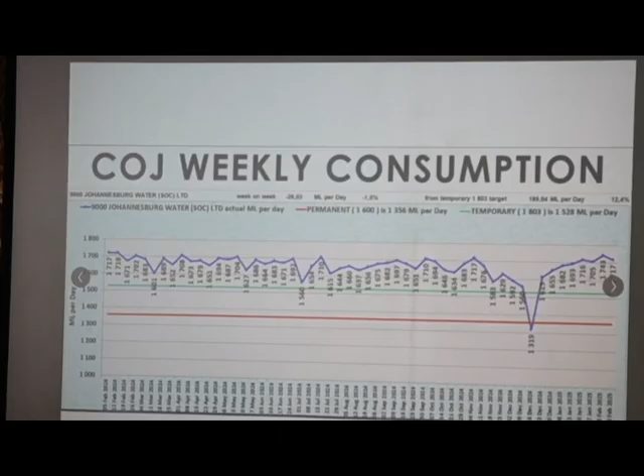For some reason this thing is now not working. Beautiful. City of Joburg - you can see it's a lot closer to the actual demand, looking much better there. And then City of Joburg also using quite a bit more than the allocation. So combined, Gauteng is using a lot more water than what Rand Water is geared to supply.

Now, some people were talking about the Lesotho Highlands project and how that's affecting the supply, and there will be restrictions because of the Highlands project. If you look at this, I've got some bad news for you. When they open that tunnel, when we get water from Lesotho, the problem is not going to disappear because we're consuming more than what we can supply within the network.

So it doesn't matter whether we have 100% full dams. If we can't get that water to the user, we have a problem. And that's exactly what we have.

Staff cannot flush toilets - I see heads nodding all over. Staff cannot use ablutions, customers and visitors can't use ablutions. So what now? So I want to focus on...

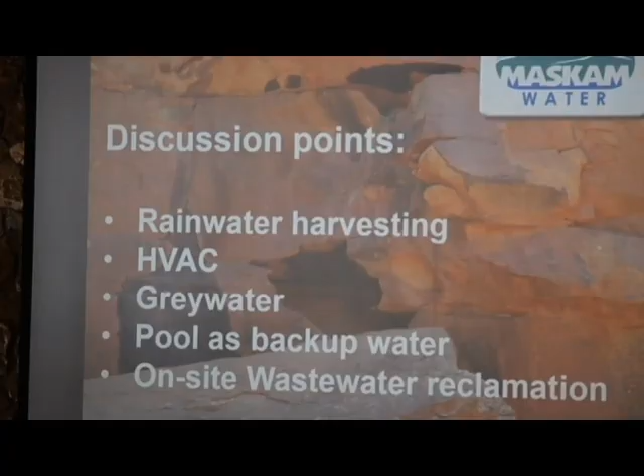Five different interventions that we can do. The nice thing is these interventions save us money while improving our water security at the same time.

The first one, we look at rainwater harvesting. There is a myth, and I've heard many people telling me it's no use harvesting rainwater because it's not enough.

Now, by a show of hands, I want to ask two questions quickly. Who in this room has either backup power or solar power at their houses or at their businesses? Okay, how many of you run completely off-grid, that you don't use any Eskom, you only use your alternative energy? Only 2, 3.

Now, that speaks volumes. Because on the one end, we expect rainwater to take us off-grid, to take care of our total need, and if it doesn't, we're not interested. But when we do solar power, most people use that to save money, to reduce the load on Eskom, and to have power when there's load shedding. But you still have an Eskom connection.

Rainwater is exactly the same. It's not there to take care of all your needs all year round. But whenever it rains, you harvest some water, you reduce your intake of fresh water from the municipality, and you allow the municipal systems to recover. So the municipal systems become your Eskom. They then have capacity when your tanks are empty.

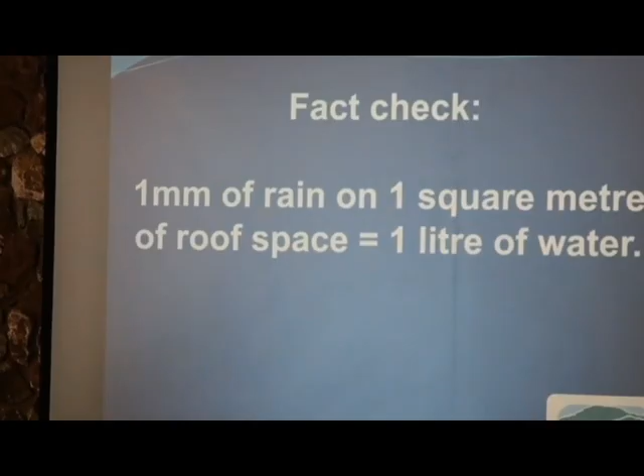And just look at the volumes we can harvest. 1 square meter, that's about the size of this. 1 square meter, 1 millimeter of rain gives you 1 liter of water. If you look at it differently, and you have a property with a 200 square meter roof, you can harvest 2,000 liters of water with only 10 millimeters of rain.

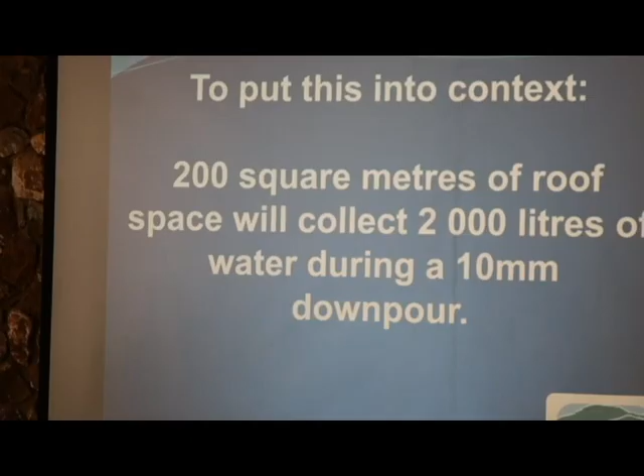Now, I did a calculation for a site in Limpopo not so long ago. They get 600 millimeters per year. Now, if you take your 600 millimeters per year and you have a 200 square meter roof, can you see how much water you can actually capture? You may not be able to store all of that, but even if you can store 50% of that, it speaks to water security and it speaks to you saving money because that's free water.

So, if we say rainwater harvesting is not worth it, think again. If you need bigger tanks, Chris is sitting in the back there, they do megaliter tanks, so that's also not a problem. You can store water.

The other side of it is parking lots, hard landscaping, hard surfaces. Now, I don't want to drink water coming off a parking lot because often it's contaminated with oil and tire waste and whatever else. But you can use it for non-drinking purposes.

How many square meters, now let me rather say how many hectares of parking lot do we have in Joburg? And all of that water runs off into our rivers and into our dams. Then we say we have a water shortage.

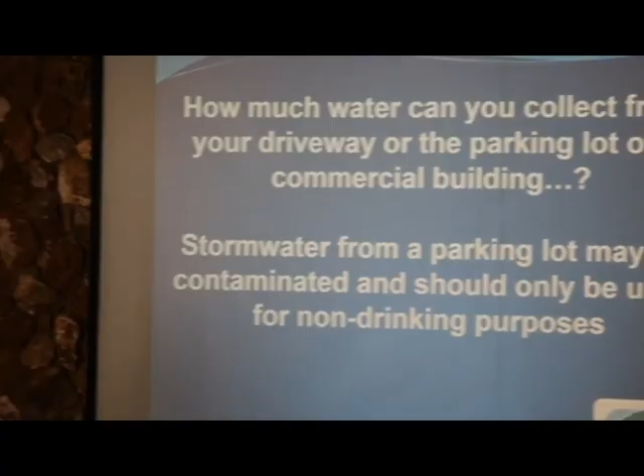Now, I've been very vocal about this, both in the city of Cape Town and Nelson Mandela Bay drought situations. In Cape Town, during the 2018 drought and day zero that everybody in Gauteng and worldwide knew about, the city of Cape Town was still dumping 450 million litres of treated effluent into the sea on a daily basis. Nelson Mandela Bay was still dumping 250 million litres of treated effluent into the sea on a daily basis.

Then we say we have a water shortage. We don't have a water shortage. We have a water management problem. Cape Town is now about to spend 5 billion rand on desalinating seawater, which will give them 50 to 70 million litres a day. 5 kilometers upstream, they dump 60 to 80 million litres a day of treated effluent into the sea. But we say we have a water shortage.

We need to think a little bit different. What can our parking areas do for us in terms of non-drinking water?

If you look at flash floods, yes, our rain patterns do change. It's been changing for the last couple of thousand years. But flash floods are also man-created because when we have natural earth, like we have around the country club here, and it rains, the soil absorbs a lot of water before you get runoff. With roofs, parking lots, and roads, every drop that falls runs off.

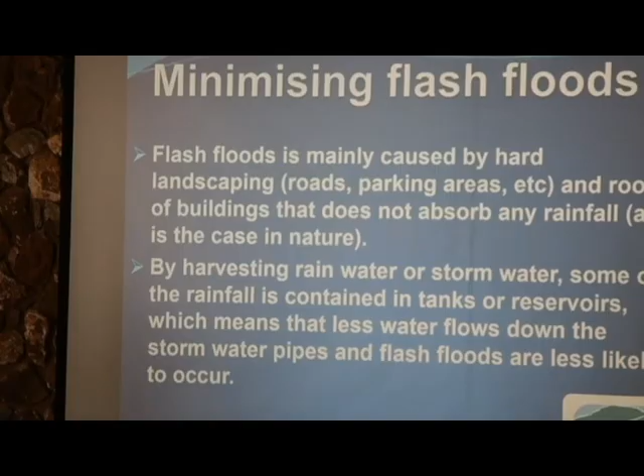Now, when we harvest rainwater, very important, we now first fill our tanks before we get runoff, before we get overflows. And you're going to say to me, yeah really, I've got a 5,000 litre tank at home, you think that's going to make a difference to the flood? No, it's not. But 1,000 of those 5,000 litre tanks is 5 million litres.

Now it starts making a difference. Now we start reducing our flash floods. So you see how this is all interconnected at the end of the day, and how what we do on site can have a huge positive impact downstream.

What we need to keep in mind with rainwater is that it tends to be acidic, and you need to adjust your pH before you take it into the property. Brendan will tell you what happens to your copper pipes if you put acidic water through there. How many years before you start replacing them? It's going to be a while, about 5 years average, then you'll start seeing water leaks coming through because you're putting acidic water through your copper pipes. Very important that you do pH adjusting if you take rainwater indoors.

There's a few things, not the only ones, but just a few things to keep your tanks clear. I spoke with somebody on Monday about this, and he said, you won't believe the amount of debris I'm getting from my gutters. I said, yes, that's why you need a pre-filter before you go into your tanks. Otherwise you collect all of that debris into your tanks and you pump that. It shortens the lifespan of your pumps, and if it's organic, it may cause problems with pollution and put a lot of strain on your filters.

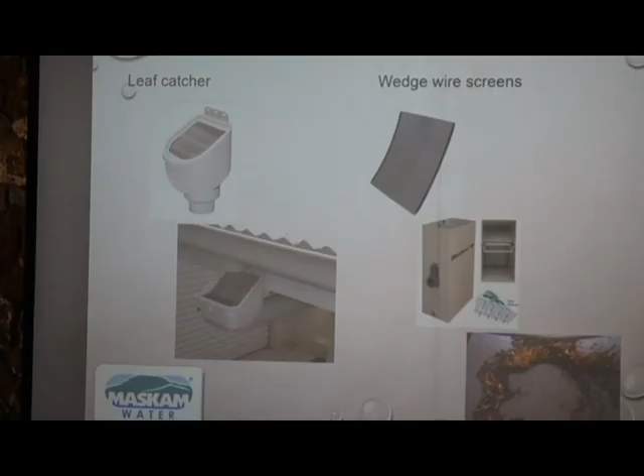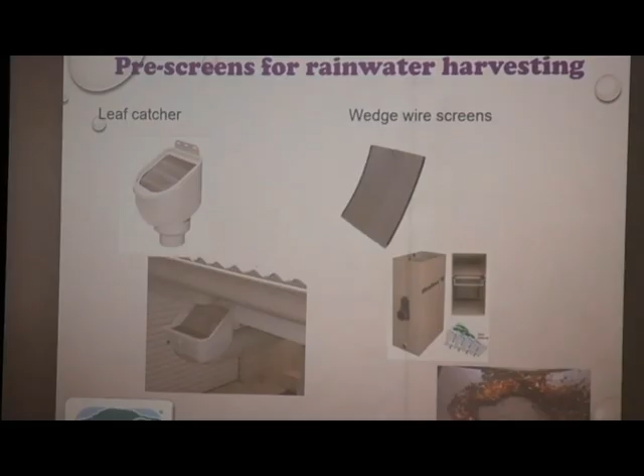So there's your leaf catcher. There's also first flush, that's not on here. There's these screens - that's a photo I took in Cape Town. You can see that wedge wire screen catching even algae coming off a tile roof. You've got your top of tank filters, you've got your vortex filters. These are very nice, especially for commercial buildings. With a vortex filter, you lose 10% of your water because it uses 10% to flush out the filter, but you never have to go and manually clean it. So from a maintenance point of view, it makes a lot of sense.

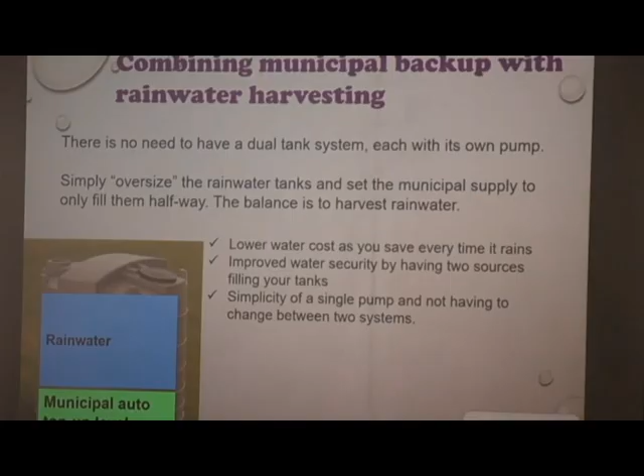When you do backup systems - Gerhard touched on that, people spending money on backup systems. You've got those 10 tanks standing there and they're all empty now. So what now? Now you have a backup system, and then you want to do a rainwater system, and then you want to do a borehole, and your borehole is dry or so contaminated you can't use it, and then eventually, how do you manage all those systems?

We've got a very simple way of doing that. One of them is for your backup systems: oversize your tank. In other words, if you need 10,000 litre backup, put 20 or 30 or 40,000 litre tanks up there. If you need 1 million litre backup, put 2 or 3 million litre tanks up there. And your backup you will set to a specific level, so your municipal water will always fill up to that point.

Whenever it rains, your rainwater will fill up the rest of the tank. And when your rainwater fills the rest of the tank and you start using water from the tank, you first use your free water.

Now, City of Joburg, for commercial properties, charge about 64 Rand per kilolitre for water, and they charge another 34 Rand for sewage. Your sewage is connected to your water intake, so you're paying 98 Rand per kilolitre plus VAT. You're saving 98 Rand per kiloliter a year.

But again, when you use this water, you allow the network to recover because you're not using network water. So when you're getting down to this level, there is water in the network. At the same time, another benefit is, let's say you've used your rainwater and your network is off, and you get a bit of rain, it will immediately top up this tank and you have water again. So it's a win-win-win all the way. You have one system, one pump, one filtration system, and it gives you a lot of peace of mind, and it saves you a huge amount of money.

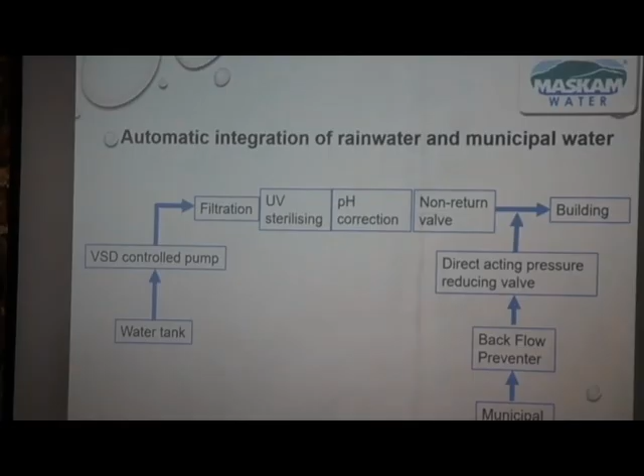This is just a quick diagram, I'm not going to spend a lot of time on this. We have your water tank, you have your VSD controlled pump, your filtration, sterilizing, pH correction, and you go into the building. Now in this case, we're not filling a tank - this is a direct municipal supply into the building.

And if you set the pressure on this one higher, then that will be primary and this one will be your backup. If you set your pressure higher on this one, that will be your primary and that will be your backup if your tanks are empty or if the pump fails or whatever.

So here you can still use this to fill up tanks as well. But here you have the best of both worlds, because now if the power drops, you have your municipal water pushing through. If your pump fails, you have your municipal water pushing through. You never need to go out and close this tap and open that tap.

Whoever wants to get up at 2 o'clock in the morning in the middle of winter to go and change taps outside? This is a fully automatic system. I'm not going to spend a lot of time on the design of it, just know it's a way you can have it hassle-free, like you have your electricity and your inverter that kicks in the minute Eskom drops. You can have the same in water - an automatic backup system, a no-hassle system.

Very important here is the backflow preventer - that is not a non-return valve. A backflow preventer is designed to guarantee that your water doesn't push back into the municipal pipeline.

I was in a meeting in Cape Town where one of the developers said, listen, we've got a greywater system, but that's completely separate, and we have a municipal dedicated line. We want the city to exempt us from having to install a backflow preventer. Now, it's a multi-million rand development, and that backflow preventer cost a few thousand. I said to the developer, well, the city took a hard stance and said, we tell you you'll do it and you will do it.

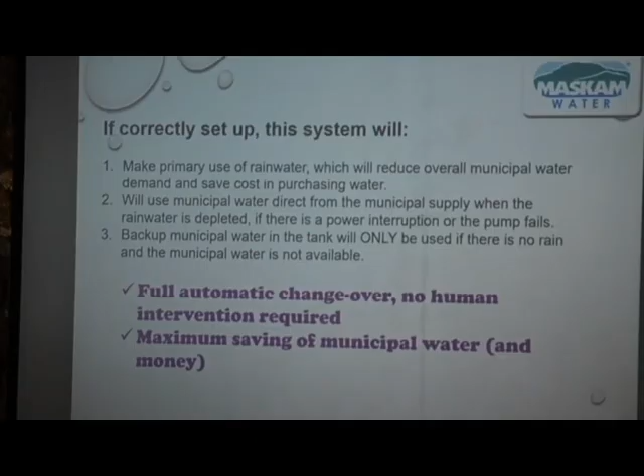So it's a fully automatic system, no human intervention required. It's maximum saving of municipal water because you're using rainwater, giving the municipal system a chance to recover. And the more alternative water we use, the better chance the system has to recover, which means there should be water in the system when we need it.

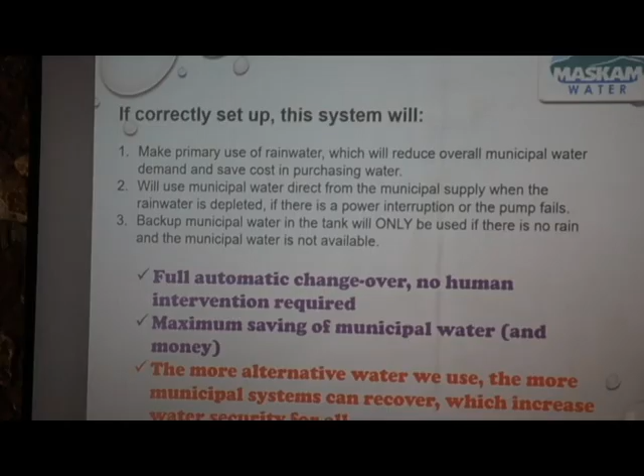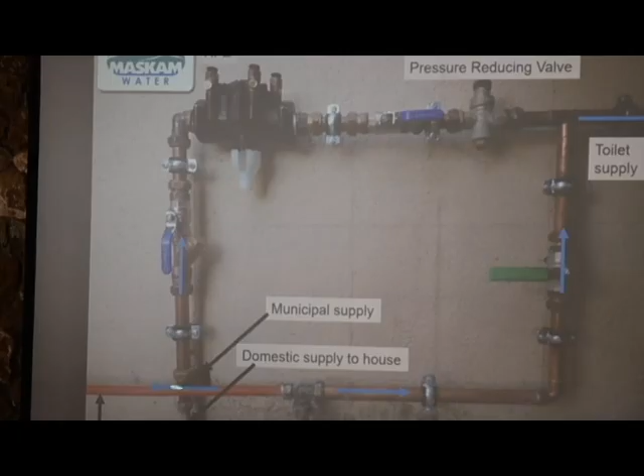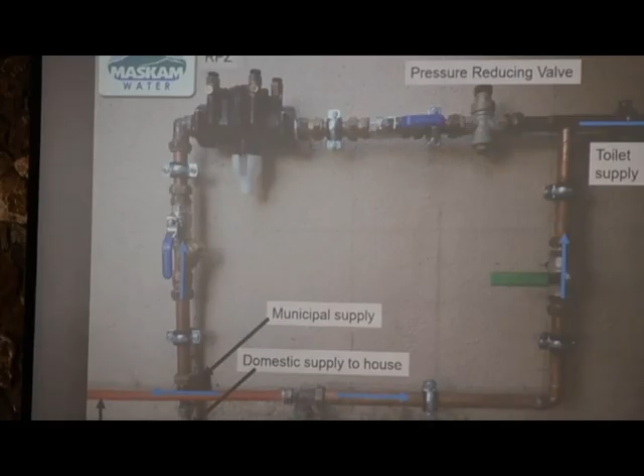Very simple installation - it was done by an IOPSA-approved installer, so don't have to worry about that. In this case, you can see that tap is closed, so the tank supply is now cut off to the toilets - there was some maintenance done at that point. But this is a very, very easy way of doing it, and you know you have a hassle-free system for the rest of your life.

So my message here is, it doesn't have to be a problematic system. It doesn't have to be, oh, I've got to remember to do this, and when it rains I must go do that - nobody's going to do that.

So just looking at 3 case studies. The first one is, well, the first 2 are single residentials, and the third one looking at commercial building.

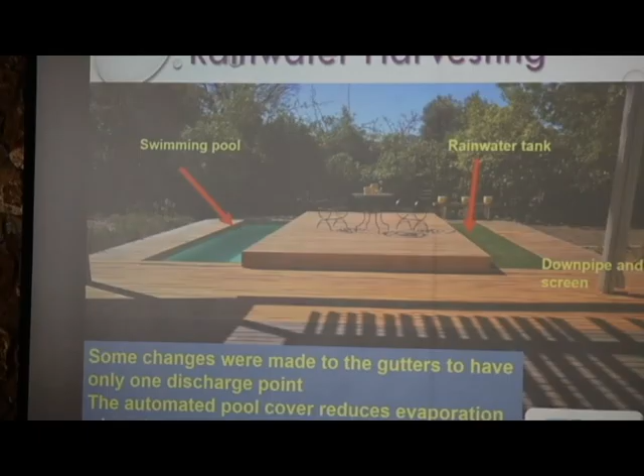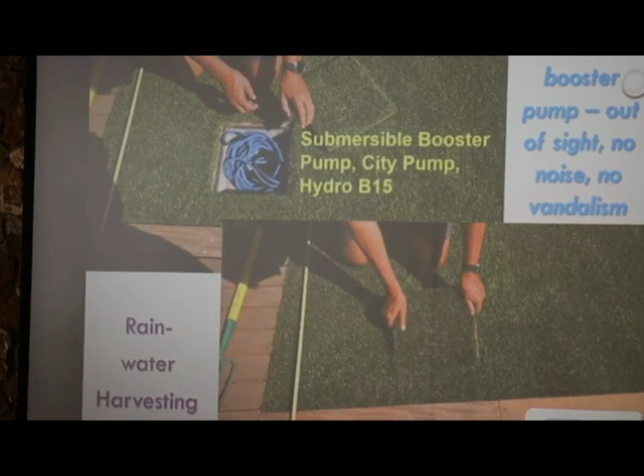The second one was a bit more difficult because there's a downpipe going to the street. There are 3 downpipes here also running to the street at the back. So all that water is wasted from site. Now in Cape Town at one point there was a bylaw that told you must take your rainwater to the street. You were not allowed to capture it many years back.

So to get this for rainwater harvesting, you can see this is a double story here, that's single story there, this is a flat roof dropping this way, this gutter is going that way. How on earth are you going to manage rainwater harvesting there? It becomes almost impossible. Agree?

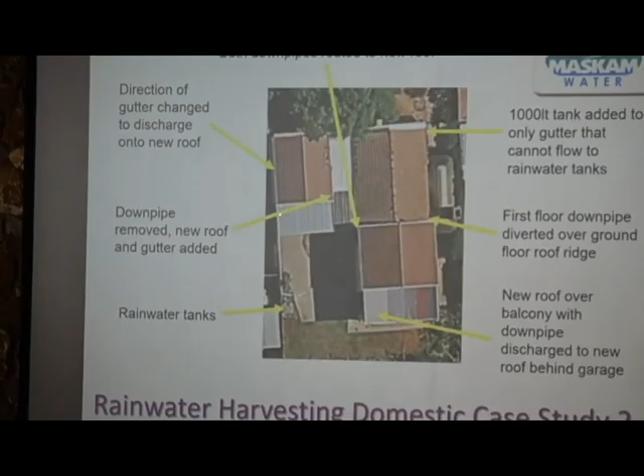Okay, the solution was a roof over here, which had to happen anyway, but then a roof at the back here, which made a big difference. So the gutter from this roof could drop back onto that one. This downpipe could drop onto that one. Because it's double story, that downpipe could be diverted over the notch here onto that one.

This one drops back automatically, and the angle of this gutter was changed to drop to the back and not to the front. The only water we couldn't capture in the central system was from that part of the roof. If we had to do that, we would need a pump to pump it through.

So if we look at it from a practical point of view, there you can see the double story pipe diverted. This was the part we couldn't capture, so that goes into a 1,000-litre tank that is used for car washing, filling a water feature and stuff like that.

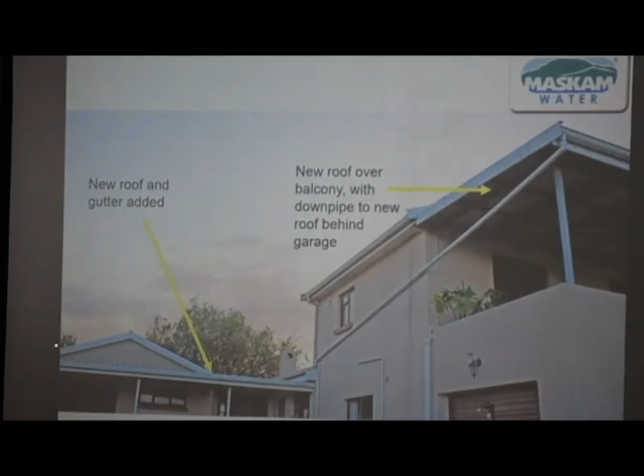And then at the back, you see that pipe coming in, you see that pipe coming in, the one on the left where the angle is changed, and everything dropping onto this roof. And from that roof, you've got a 110 pipe down to the water tanks. Small investment, but without pumping, you catch all of your rainwater.

In this case, it's about 250 square meters of roof. So 30 millimeters of rain, you harvest 7,500 liters. Can you do a 7,500 liters every time it rains?

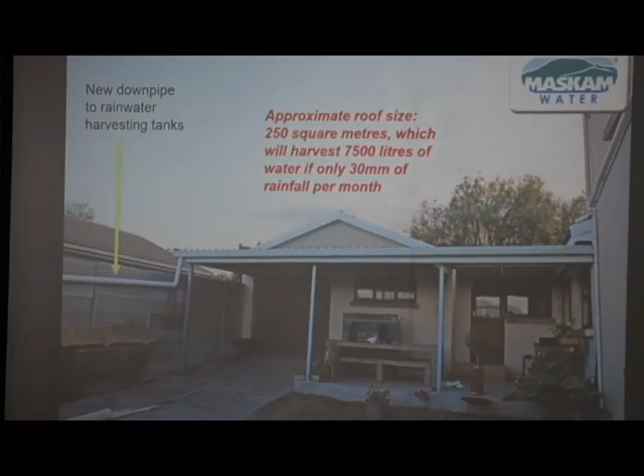Makes a difference, eh? You now think rainwater harvesting makes sense? You think it's worth it? Half of my audience is asleep.

Okay, then the same house went a bit further, installed a grey water system that catches everything from the bathrooms and the washing machine, except for the toilets. And that grey water is going into the garden for irrigation purposes. So now you have free rainwater coming down, which you harvest. You use it in the house, you discharge it as grey water, you harvest that again and use it for irrigating your garden. So you have a double win of the same water.

I used to have an irrigation business in the 90s when automatic irrigation systems sort of started becoming fashion. People would often ask me, remember it was many years back, if I spend 15,000 Rand on an automatic irrigation system, can I add 15,000 Rand to the price of the house when I sell it? And I said, no. Nobody will spend or pay 15,000 Rand for a second-hand irrigation system.

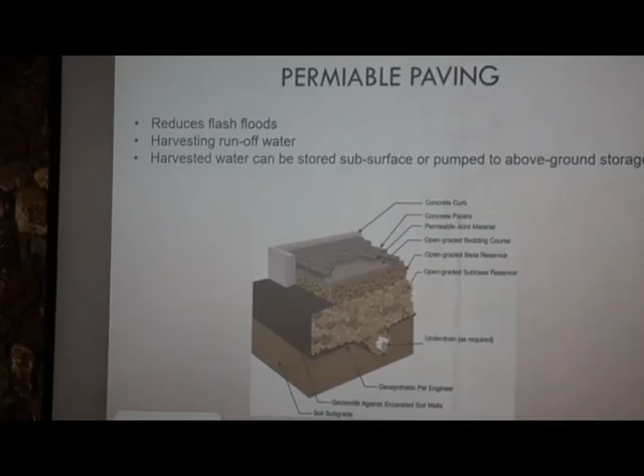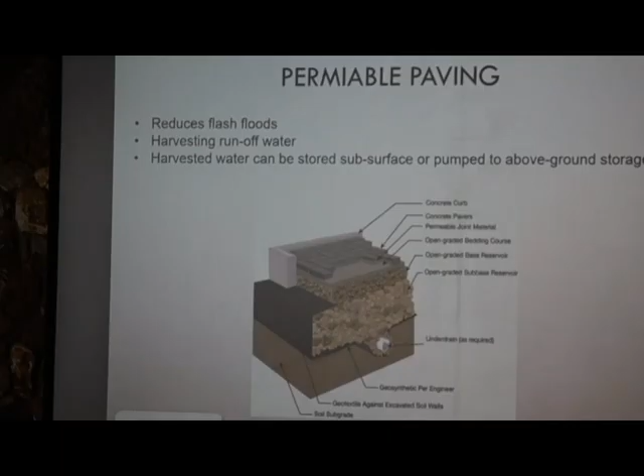So now you can harvest all of that water without creating a storm. Harvest it underground, pump it to above ground storage, doesn't matter, and you can use that.

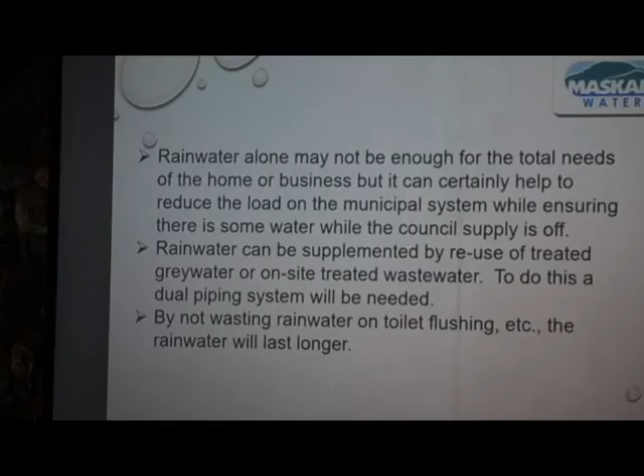Now, as I said, rainwater may not be enough, but it can be supplemented by use of grey water or on-site treated wastewater. Very important, if you use alternative water, grey water or wastewater recycling, to flush your toilets, to irrigate your garden, it means you put less pressure on your rainwater system. So the rainwater in your tanks will also last longer.

Why do you want to use rainwater to flush your toilets and then you need to go and buy water to drink? Use alternative water to flush your toilets and you'll have rainwater in your tanks for longer. Yet another way of saving.

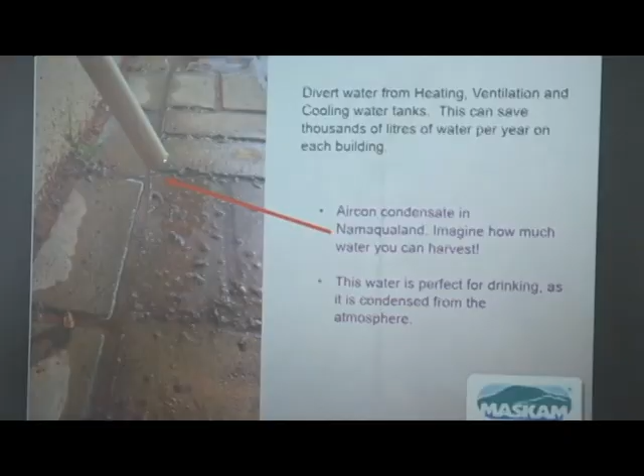This is just one slide on HVAC. This photo was taken in Vanrhynsdorp in Namaqualand in the month of October. That's the runoff from one single air conditioner that you see there. How much water can you harvest off your air cons, your heating systems, your ventilations? And that's pure distilled water.

Who of you have heard about air water generation? A few hands here. This is air water generation. It's condensate from there, pure drinking water, and we're dumping it on the paving and then we say we have a shortage of water. Harvest that, lead these pipes to your rainwater tanks.

Again, you don't need another system to do that. You just need to get this water to your rainwater tanks. And that will constantly top up your rainwater as long as your air cons are running, as long as your geysers are heating water. Immediately you have an additional top up. So there's an additional benefit.

If you look at our pools, pool water has never been seen as a source because of the chlorine or the salt content. What we can now have is a pool that can become a backup. Now, I'm not going to tell you to drink your pool water because you never know what happened in that pool, okay?

But it can be a source of water in case of emergency, be it for toilet flushing, washing your clothes, or whatever the case may be. And the way you do that is you get away from high chlorine content, you get away from high salt content by installing something like the Blue Lagoon pool systems. You get UV with copper, UV with ozone, different combinations. And you can either reduce your chlorine by 90% or you can go completely chlorine free. Now you have a freshwater pool.

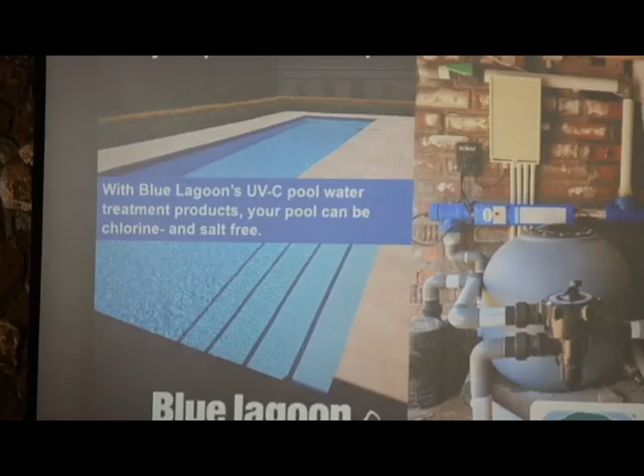Oh, sir, but I don't have a place for water tanks, I can't harvest rainwater. There's your water tank, you can top that up with rainwater. There's no need to top up your pool with municipal water.

Brendan and I had a bit of a chat the other day on LinkedIn about that as well. When you have a rainwater tank, you take your overflow to your pool. Why do you want your overflow to run away and then buy water for your pool?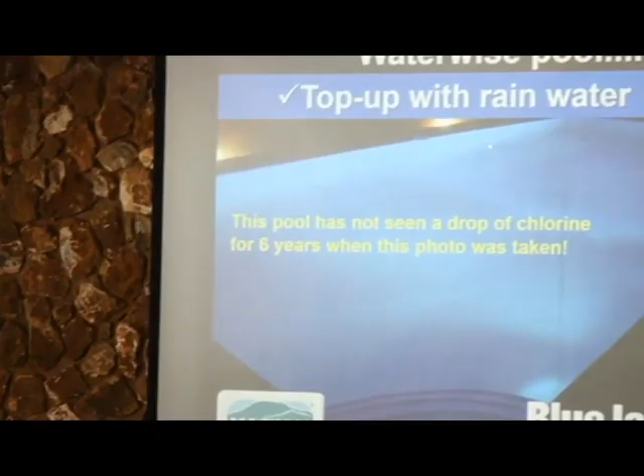Now this pool was taken with a standard Nikon camera, nothing was photoshopped on it, and you can still see the creepy crawly pipe at the back there. And this pool hasn't seen a drop of chlorine for 6 years when this photo was taken. This is what's achievable. Also, it's good for your health because you don't have that chlorine irritating your nose, irritating your eyes, you don't have the dry skin and all of that. But besides that, it becomes a perfect reservoir in times of need.

This is a commercial pool at the gym. Now, there's a lot about this. They had to replace the steel structure of the roof because of the chlorine gas that corroded the steel.

Then they replaced this with UV, and this photo was taken using my cell phone about 9 months into operation. You can see how beautiful that pool is looking there.

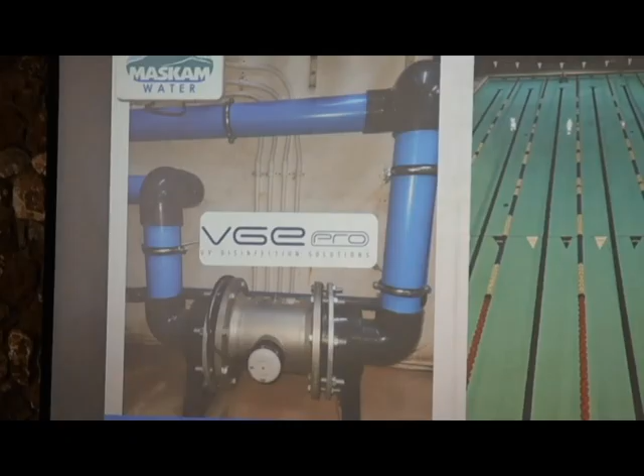So even on commercial pools, you can install UVs, reduce your chlorine, and your backwash water is also usable. You can take that to toilet flushing, or to your garden as well. Quite possible. Your pool can also be an automatic backup for certain functions when you install a lifting station or pressure system right next to it.

And this can be fully automated. I can show you the case study - I'm not going to do it now because it's taking too much time, but if somebody wants it, I can give it to you, where we built an actual fire pool long before Cronje. I can promise you it was fully automatic - with the press of a button, the pool pump will start and pump the water onto the thatch roof. So it's quite possible. All of these integrated systems are possible. By the way, it was a lot cheaper than Cronje as well.

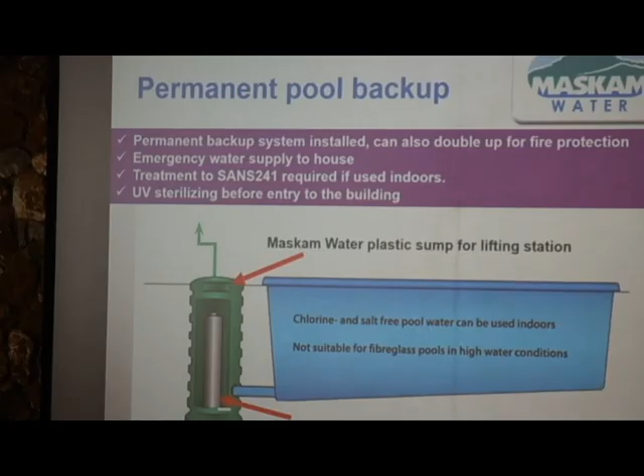Okay, any questions at this point? I know it's quite a long presentation, but I need to carry the message of hope, the message of solutions.

What's the cost of using UV light for treatment of the pool? The cost of a UV light for the pool compared to chlorine - your initial capital cost, depending on the size of the pool, can be anywhere between 7,000 up to 20,000 rand, that's the money you've got to pay for the equipment. But then you replace the lamp once a year if your pump runs 24/7. If it runs 12 hours a day, you replace your lamp every 2 years, at a cost of about 1,000 rand. So you don't have the ongoing cost of buying chlorine. There's a capital cost for the equipment, but with installation, it's about 1,500 rand every 2 years to replace your lamp. So eventually it's a lot cheaper.

Any other questions? There are also rainwater treatment systems to be able to use rainwater in your house. What would the cost of that be? Is it a household rainwater system or a grey water system?

Rainwater system. The average cost of a rainwater system depends very much on what needs to be done. As you've seen in the other case study where gutters had to be moved and roofs had to be added, that becomes a more costly exercise. Other than that, you're looking at a water tank, depending on the size and the amount you want to store. You're looking at about 1,000 to 1,500 rand per 1,000 liters of water, depending on the manufacturer. In other words, a 10,000 liter tank costing you about 15,000 rand. And then you've got your pump and your filters.

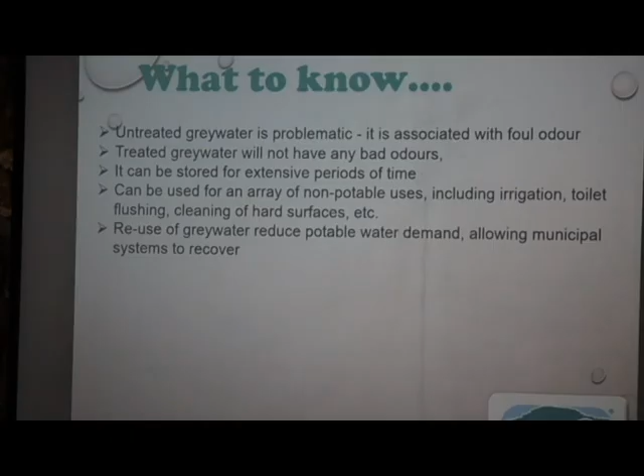When you use grey water, you reduce your potable water demand, so you save on your municipal bill. But even if you do rainwater harvesting, your rainwater tanks will last longer, so you get a double benefit from the same water source.

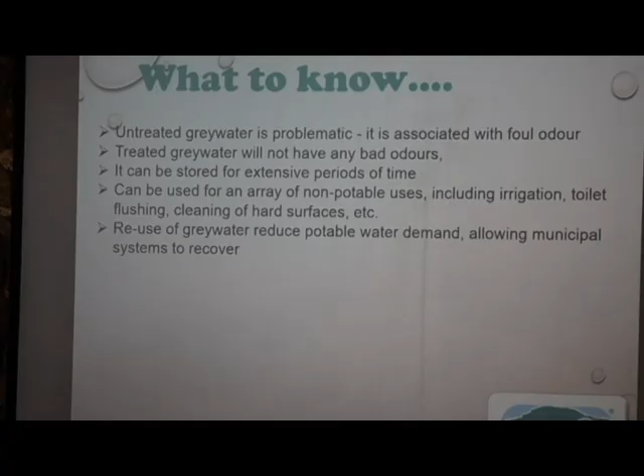At the same time, coming back to what Darren said - if we use our grey water, we reduce the amount of wastewater sent to municipal systems, which are often overloaded. When we reduce volume to those systems, we give them a chance to do a better job. Not only will they discharge less water, but they'll discharge treated effluent of better quality, which has a double benefit to our river systems.

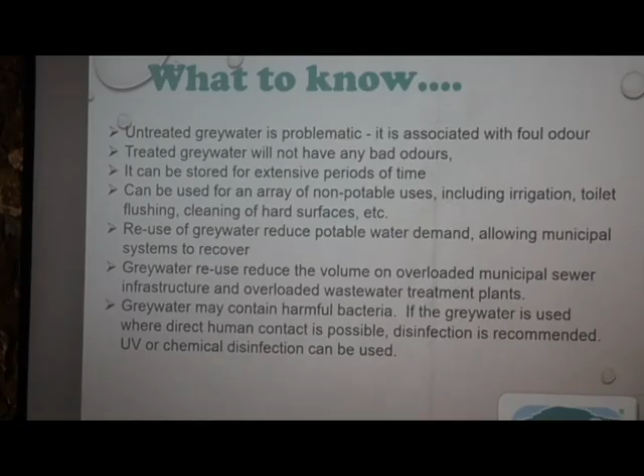Keep in mind, depending on the source of the grey water, it may contain bacteria if somebody was ill or something like that. So if you use it where human contact is possible, like irrigating a sports field someone's going to play on, disinfect it before you use it for irrigation purposes.

From here on I'm going to use a few products built by my own company. I'm not saying these are the only products on the market, or that they're absolutely the best - we always try to be the best. I'm using this as an example because it's what I know best. There are other companies and manufacturers in the industry. This isn't to talk down to any manufacturer or play one off against another - I'm just showing you what is practically possible.

In this case, it's an underground tank - the one you saw in the lawn. You'll see it again just now. Underground tank with a filtration chamber, taking out the hair and lint and other stuff, and a storage chamber where it's aerated, and then we pump from there.

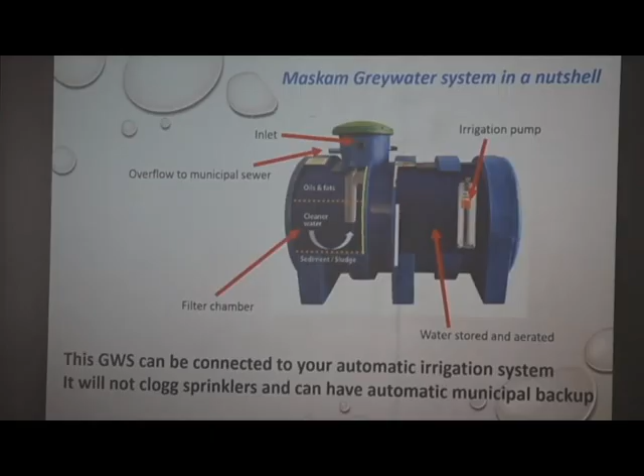So you're taking a lot of your coarse debris out here - all that stuff that normally clogs up your non-return valve and the pump itself. We filter those things out beforehand, and then take it into the irrigation system. With this system, you can run it through automatic irrigation and it won't clog your sprinklers.

The longest one in use is 9 years now, without any problems - that's that same one there. We do have another irrigation filter to take out finer stuff. Remember, we've got the coarse filter on gravity, and then on the pump line a finer filter, and it feeds straight into the irrigation system.

In this case, there's also an automatic changeover because the grey water alone may not be enough. So when you run out of grey water, or if you're on holiday and there's nobody generating grey water, the tank runs out and you automatically change over to municipal water. It's all done automated again.

Now you can go one step further. You have your rainwater harvesting system, and if that is full, it can overflow and top up your grey water system. But you need to be very careful when you do that, because when it's full, you want your grey water to overflow to the sewer, otherwise it ends up in our rivers. And you want your rainwater to overflow to the stormwater, otherwise you flood the sewer systems and create another problem. It's doable - we've done it before.

So the two waters will mix in the tank, and when the tank is full, it will actually shut off the rainwater and divert it to a different direction, going into the stormwater, while the grey water will just overflow into the sewer system. So that is quite possible.

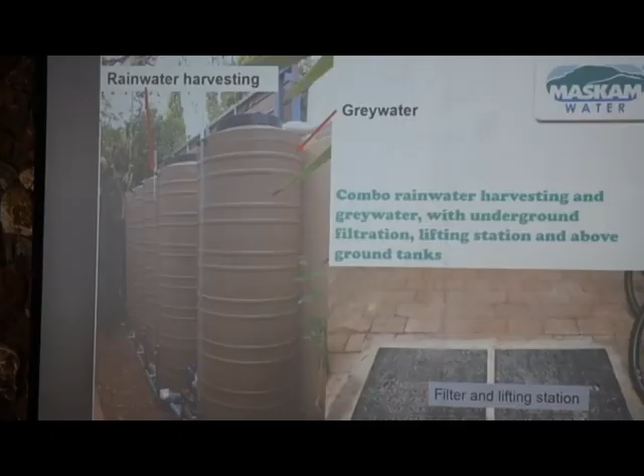There's your filter station and your pump that you see in the picture there, and the little panel that we've built that does your automatic switchover.

So here you can have different inputs, your tank water and municipal water, with an automatic switchover. But remember, with the automatic switchover, you need to have your RPZ in place as well - the panel is not the only answer. You definitely need to do that RPZ.

This is for a block of flats. There's your filter chamber, there's your storage aeration chamber, and here we go in a double VSD system through the filters, through disinfection, and then it goes back into toilet flushing.

Remember, toilet flushing in a domestic setup is about 30% of your water, so if you do this, you save 30%. In this case, it's a block of flats, so there's not a lot of garden compared to the amount of grey water - they have a lot more grey water than what they can use for irrigation, but now they can take it back to the toilets as well.

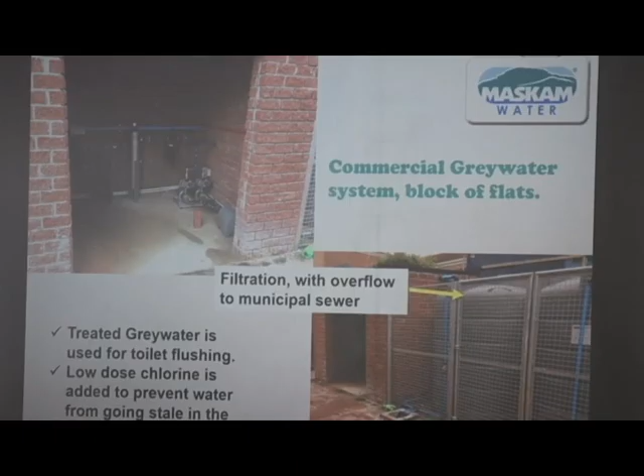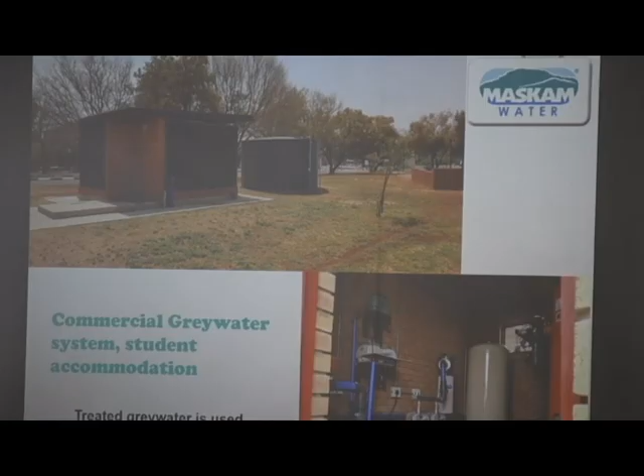And this is a university campus with a grey water system. There's an underground collection tank below this building, and then it's filtered and stored in the tank there, then used again for toilet flushing and for irrigating the sports fields. So these are the practical things that are possible with grey water systems.

Again, I'm not going into design details because then you'll be here till next week, and I don't think you want to listen to my voice that long.

Any questions on grey water before we move on to the last topic?

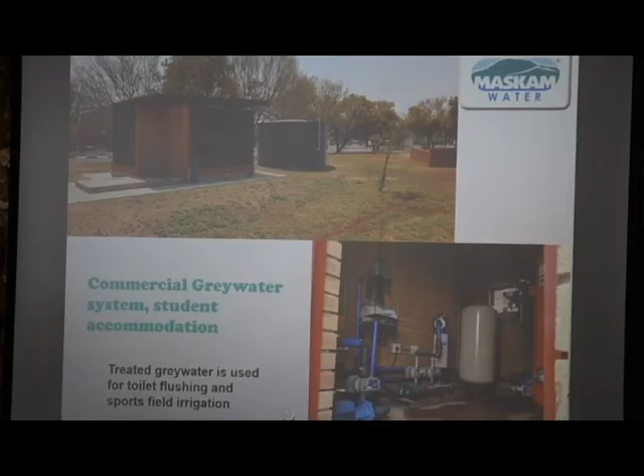Are there restrictions as to where you can use grey water? You cannot use it anywhere it comes into direct contact with humans. In other words, you can't use it for showers, you can't use it for drinking, but you can use it for irrigation, hard landscaping, and cleaning - not human contact, not inside the house.

Of course, you don't want it on your neighbor's property, because why give your neighbor free water if you have a shortage? And definitely, with rainwater or grey water, you don't want runoff into your stormwater system, because then you start getting into river pollution again. So there's a few basic things to keep in mind.

If you use it for garden irrigation, whatever nutrients are in the grey water will be taken up by the plants. What I didn't mention is that your grey water often contains ammonia, coming from detergents or from somebody taking a leak in the shower. Ammonia is not good for the garden in the long run, but a grey water system using an aeration process will change your ammonia into nitrates, and nitrates are fertilizer for your plants.

I'm speaking of practical sites I've done in Cape Town. One site used 18 kiloliters of grey water plus 12 kiloliters of municipal water per month in summer to keep the garden alive, on the old anaerobic grey water system. With the drought in Cape Town, I designed and changed over to an aerobic system. I shut off the municipal line because of the water shortage and said whatever survives on the 18 kiloliters of grey water must survive, and whatever dies, too bad. The garden ended up looking better using only the grey water with aeration than it did using 18 kiloliters of grey water plus 12 kiloliters of municipal water.

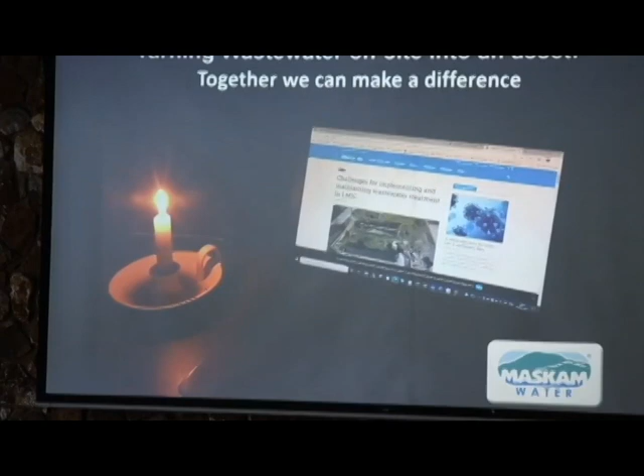Right, let's look at where we can make real big impacts: wastewater. Things have changed quite a bit now compared to 5 and 10 years back. But in general, if you have a high density commercial area and now need to start treating wastewater and use it, how many people think it's possible to do that in a high density city environment?

That's only 4 people in the entire room. Well, okay, you're one of the 4, Laura.

Let me show you something. First, let's look at our water cycle. We have our catchment area, which normally ends up in a dam somewhere. We abstract from that dam, put it through a filtration system, use it, discharge it through an overloaded municipal wastewater treatment works, and pollute our watercourse.

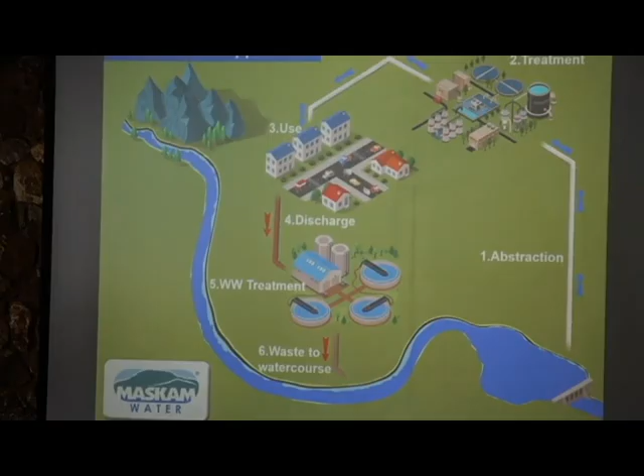Now this is very important. Remember what I said earlier, when you flush it, it's gone, it's out of sight, it's not your problem. Look what's happening here. It's coming back to be your problem, because you're feeding it into watercourses that feed your drinking water.

I do apologize for the sensitive ears, but you're literally pouring into your own drinking water. When you discharge your wastewater to a non-functional or overloaded municipal wastewater treatment work, you're pouring into your own drinking water. There's no nice way to say it.

Okay, but in my town it's different, because the wastewater system discharges below the dam wall. Oh, beautiful, you just feed it to your neighbor. Come on, where's Ubuntu here? That's what we end up doing.

At a previous meeting, I asked everybody by a show of hands who believes eating healthy is good, and just about everybody put up their hands. Then I asked who likes some nice grapes every now and again, and everybody put their hands up again. I said, now you think if you flush a problem in Gauteng it's going to go down the Vaal River and it's not your problem? Guess what? Your grapes come from Upington.

The farmers in Upington have a problem with E. coli in their water in the river, because that river is coming from Gauteng. So you export your sewage problem to Upington, and you import it back in the form of grapes. That's how the water cycle works, whether we like it or not.

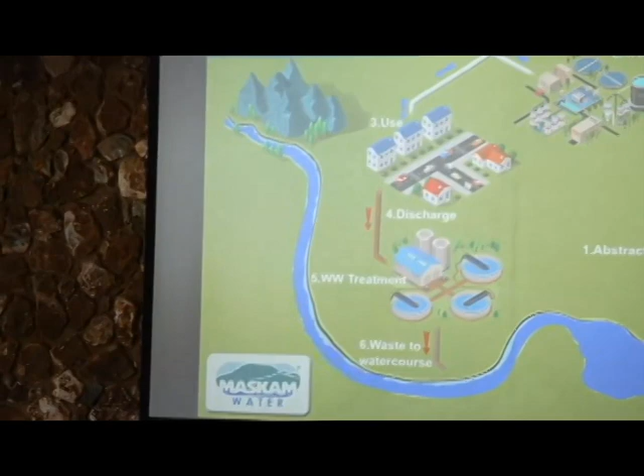But there's another little problem here: the carbon footprint. Again, not many people think that water has a carbon footprint. It's a natural thing, how can that have a carbon footprint? Would you agree?

Well, the problem is, if you're in Pretoria and you get water from the Vaal Dam, what's the figure? About 60% of Pretoria's water comes from the Vaal, I think. If you look there, that's 124 kilometers line of sight, so you're looking at about 150 to 200 kilometers of pipeline needed to pump that water.

But your problem is, from here to there is a 300-meter rise. You need 30 bars of pressure to lift the water to Joburg before you can flow it down to Pretoria. To give you an idea, your irrigation system at home runs on 3 bars, your average geyser runs at 4 bars. We're talking 30 bars here to lift that water to Joburg before you can get it to Pretoria.

What is your carbon footprint on that pipeline? What is your carbon footprint on those pumps? What's your carbon footprint on the electricity used for that? And we're not even talking purification and all the other stuff that goes with it. So your cost and your carbon footprint become huge in cases like this.

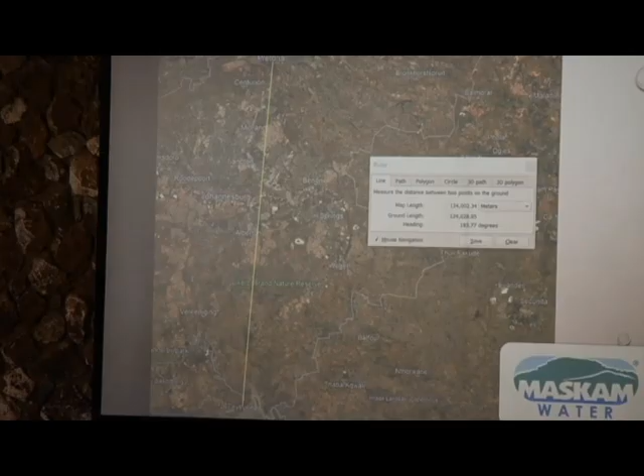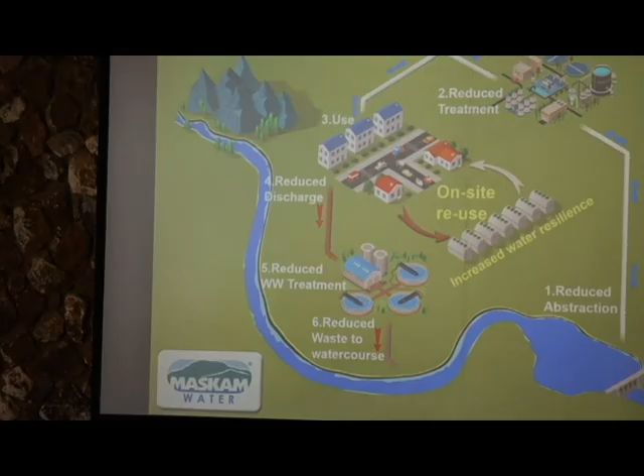So what we now do is start thinking a little differently. When we do on-site reuse, whatever wastewater we have, we treat on-site and take it back. We now start talking about increased water resilience. Remember, every time you flush a toilet and treat it, you have water to flush the toilet again, no matter whether the municipal water is on or off.

So we're also talking about continuation of operation, because people can stay on site, at least they can use the ablutions. Yes, you may have to buy water from your local grocery store for making coffee, but at least you have water for ablutions that you don't have to truck in.

But the minute you do this, you reduce your abstraction from your watercourse. You reduce the pressure on your treatment system. You reduce your discharge, you have fewer overflowing sewer manholes, and you reduce the volume into Olifantsfontein wastewater treatment works. So you get a better quality effluent feeding the Hennops, which eventually feeds Harties again. So you improve your total water cycle.

You score big money here. I don't have the figures right now for City of Tshwane, but for City of Joburg, commercial again, we're talking 98 rand a kiloliter to get water from there. For commercial reuse, you can do it for as little as 8 rand, a saving of 90 rand, close to 90%. Which other investment will give you a saving of 90%? Come on, think about it.

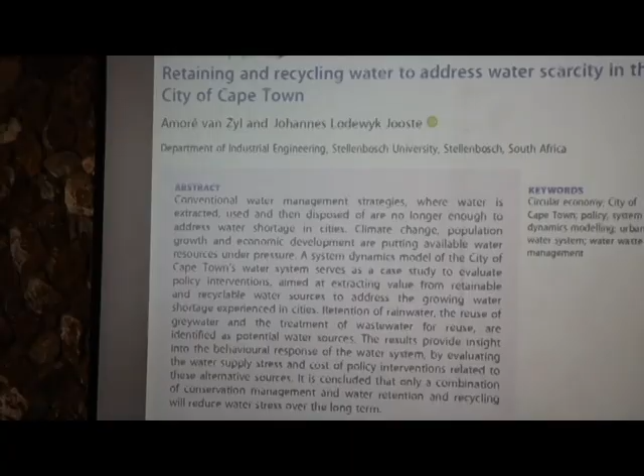In 2020, the University of Stellenbosch said retaining and recycling water is needed to address water scarcity in the city of Cape Town. They looked at all possible water sources for Cape Town's future and excluded desalination because of the cost. There's a whole document on this, and if anybody wants it we can email it to you, talking about the benefits and how recycling will save the day and become a water source for the future. Exactly the same thing applies here.

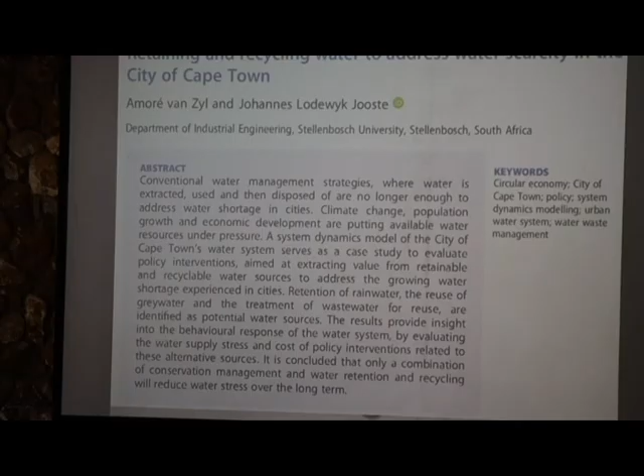I'm going to show you one technology. There's not enough time to go through different technologies. Yes, it is our technology, so I'm a little bit biased here, okay?

The Fusion system is an underground installed wastewater treatment plant that will recycle your water on site for you. It comes standard with a panel that has an early warning system, so if anything goes wrong, it will immediately warn you before you have a pollution problem. I think these early warning systems are critical, because something can go wrong since it's man-made, but you need to know when things go wrong.

I'm not going to spend time on the technical side of it. Just keep in mind, without disinfection, there are at least 6 steps of treatment that need to happen to get to the water quality that, by law, you need to reach if you want to use or discharge this water. Otherwise, for pollution reasons, you end up relying again on your drinking water.

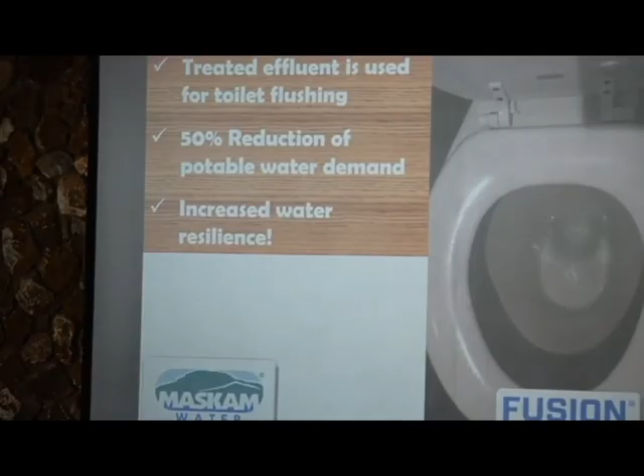This is what we're getting out of the system, and we've cut the water demand by 50%. Remember I said for domestic toilet flush it's about 30%. Here we're talking about a commercial building where toilet flush can be up to 90%. In this case it's 50% because they have showers and stuff as well. So you've just cut your water bill by half, but you have water resilience. You always have toilet flush water.

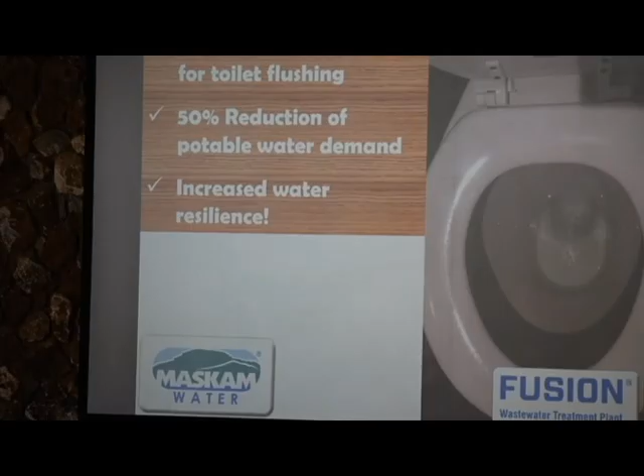For 6 years going now, I think the case study speaks for itself. You can do it in the city, you can make a positive difference. And that's why today's theme is talking solutions, because we hear so much about the problems out in the media already. Let's talk solutions.

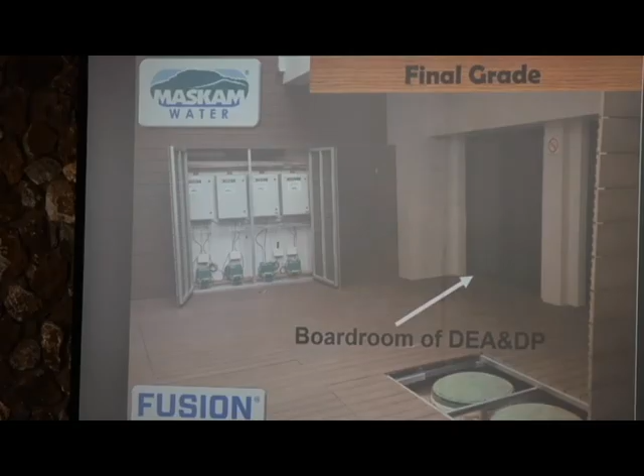This is on a small building. You can see how nicely it blends in with the gardens. There's your treated effluent again, your air pump. Going back a little bit, there's your air pumps supplying. We had to put in 4 small plants because we physically had to carry them through the building. We couldn't put one big plant in because it just wouldn't fit. But that again is the beauty of having a Lego set - you can pick what's needed. So hiding that air pump in the garden, we use a false rock.

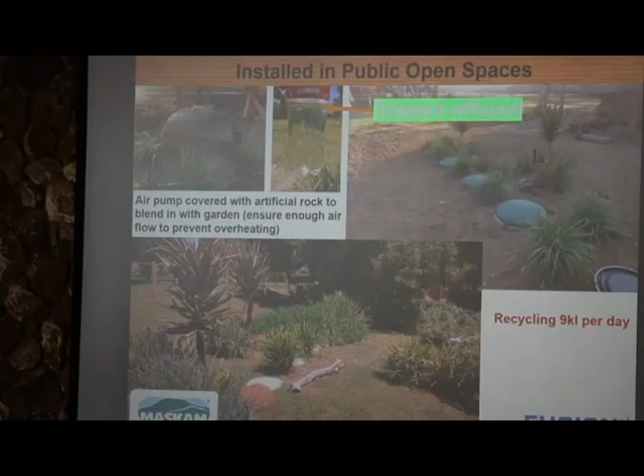In the walkway, in the paving, if you want to drive over it, you've got to do a proper slab. I know Andries has done one where people drive over it in the driveway feeding to a hotel. Unfortunately, Andries, I don't have that photo in the slideshow, but that is also possible.

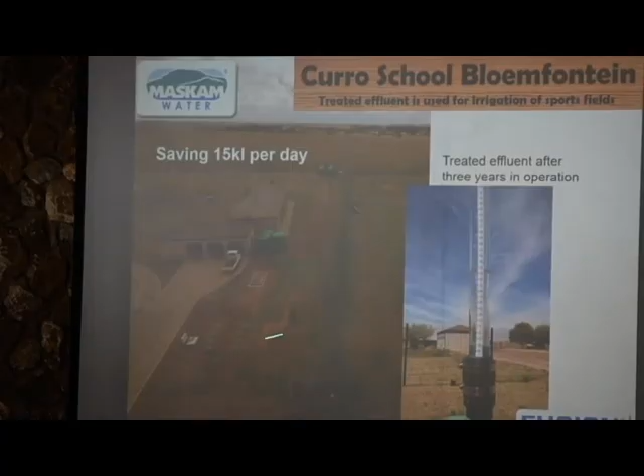Hospitality industry feeds into the fusion - they use the water for irrigation purposes. There's farms, houses at the farms. Curro School in Bloemfontein, again you can see the treated effluent - they're using that for the sports field irrigation.

But the beauty - now we start talking modular systems - this was designed for a school having a maximum of 600 learners. Then the school grew, they're just over 800 learners now, so the wastewater treatment plant is too small. Big problem? Nope. We just dropped in number 3, and now they can go up to 900 learners. When they go above 900, we drop in number 4. So we can expand as the demand of the site expands.

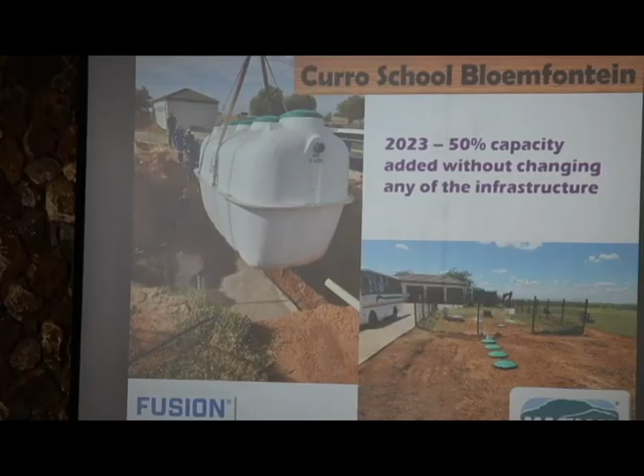Isn't that beautiful?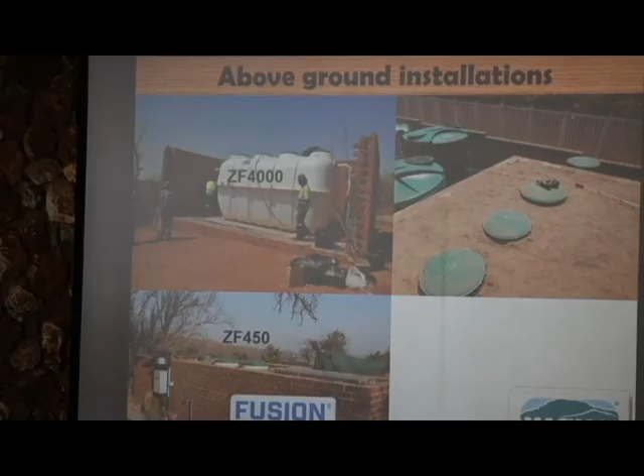They've been doing this in Gauteng since 2012. So these are all installations that Andries have done above ground. Some of them are in Mpumalanga, some are here, not very far from here in fact.

Then if we look at bigger developments, this one is in Katima Mulilo, Namibia. Each color is a different phase, so there's phase 1 coming in. They've got 2 phases up and running now - these ones are now up and running, and these phases will still come in. So even within the development, rather than having a central sewer system at a huge cost with pumping stations - because it's relatively flat there - they decentralize within the development, and each phase will get their own set of treatment plants and reuse the water in that phase for irrigation purposes. What a beauty - you literally do clusters as you move along.

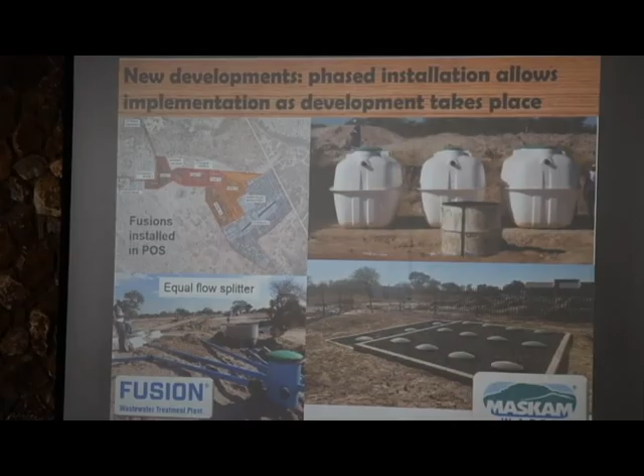There you can see the final grade of the system. This one we did phase 1 in November last year. You can see many more phases to come. Again, this is in KZN's typically hilly areas.

The EIA experts will now tell you what a nightmare that becomes - well, some will make a lot of money, so for them it's not a nightmare - but every time you have a waterway crossing or a catchment crossing, the EIAs need to go through, and pumping stations to pump it up 50 or 100 meters. So in this case, it will be fully decentralized.

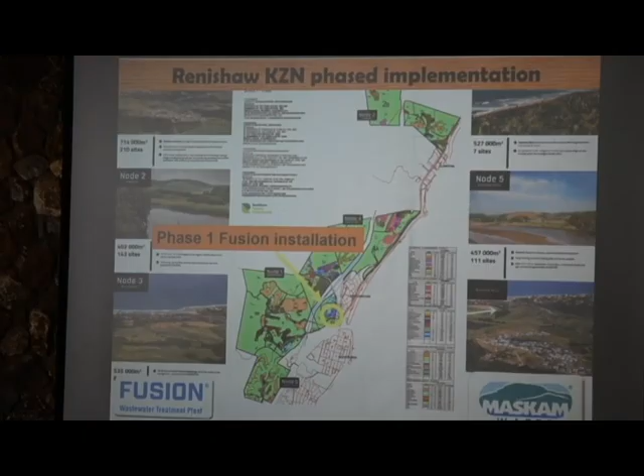This is the shopping center that we've done here - shopping center, filling station and church - and the rest of this development will come as they build. The next phase is in a few months from now. So there you can see what it looks like. These 7 plants standing here will service the shopping center, the filling station, and the church.

In the case of a domestic setup, this will serve 140 houses.

It uses 2.5 kilowatts per hour. That's nothing for 140 houses - 2.5 kilowatts per hour, and that's just for the treatment, it excludes pumping back and forth.

It's out of sight, fits in very nicely with your landscape. There are a few more projects like that coming up, and in future we will have some more to show on that.

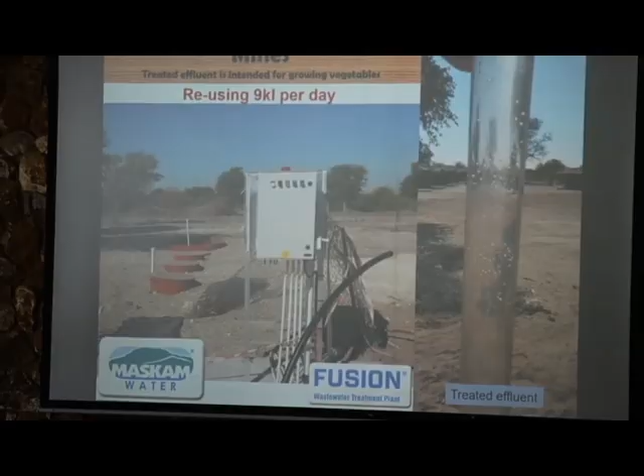But imagine from a noise point of view, you're out in nature, it's all quiet. These are individual campsites, so you don't have a neighbor. And you've got your air pump running there, you don't hear it at night.

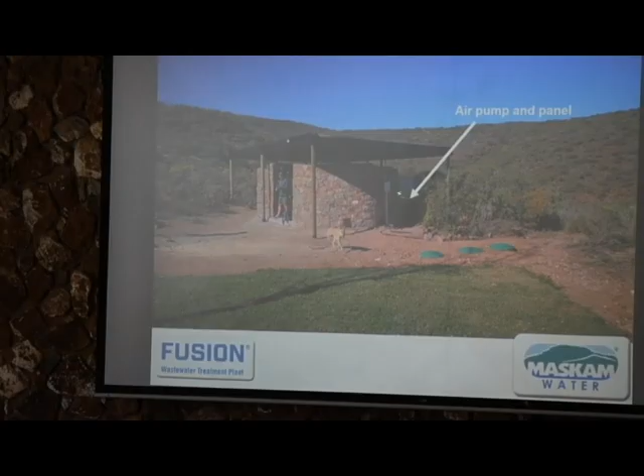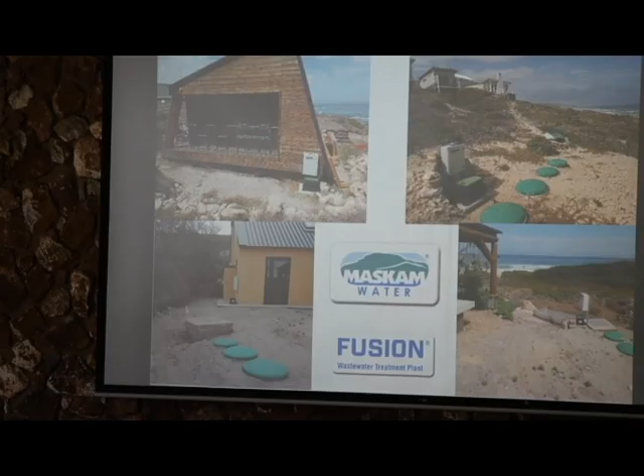There are more nature reserves. There's a botanical garden, a few others as well. We cannot do all of them.

So the case studies is just to show you it is possible in just about any location. Different technologies are suitable better for certain locations, but you can do it anyway, and you can recycle 100% of your water for non-drinking purposes. If you want to take it to drinking purposes, then you go through a reverse osmosis system. You will have, depending on the system that you use, anywhere between 25 and 45% waste.

So there you do lose water. But it also becomes more expensive.

We are busy with a case now where there is no drinking water. There is no municipal supply. The boreholes can only deliver 8% of the total volume needed. Rainwater harvesting is difficult - it's going to be done, but for 3 months of the year there is no rain. So the only option left is that we take treated effluent back to drinking water standards and then blend it in with the rainwater and the boreholes to be the total answer.

So it's doable, but it is your more expensive solution. Your cheap solution is to use that for non-drinking purposes and save your expensive water for drinking, for showering, for human contact.

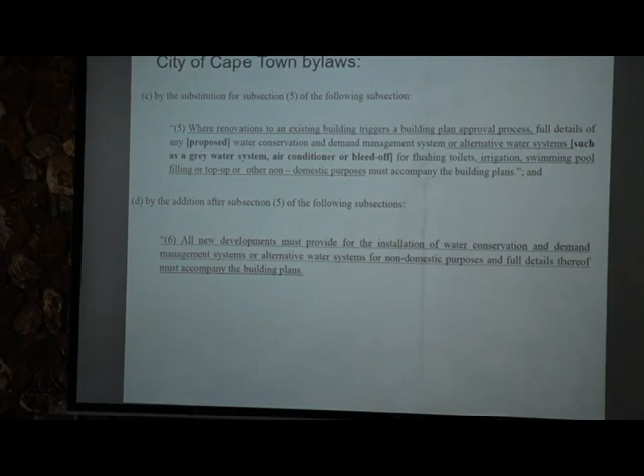It's already bylaw in Cape Town. And I stand to be corrected, but I believe that Ekurhuleni is also coming to a point where they said new developments must do their own wastewater treatment because they can't do it anymore. So these things are changing. Municipalities used to resist this. They don't really have an option but now to adopt this.

Green Cape has done a study also in 2020 promoting on-site treatment and reuse. I may be in trouble for what I'm going to say now, but I'm not known to be scared of trouble. Green Cape, their purpose is to promote green technology.

Started up and funded by the Western Cape government and City of Cape Town. Now these are private funders as well. I couldn't quite get Green Cape to buy into this thing. They did a lot of other green stuff, but this wastewater recycling thing, they didn't like that idea.

Until I went to show them the case study at Department of Environmental Affairs. Three months later, they issued this paper, because then they saw in proof what is possible. Another study by them was the Cango Caves. You can read up on it on the website - they actually give you the numbers.

And this is the first property where we did on-site wastewater treatment, August of 2010. The beauty is they're moving that house now. They've broken it down last year, they're moving it. They're taking out the Fusion unit, they're moving it with.

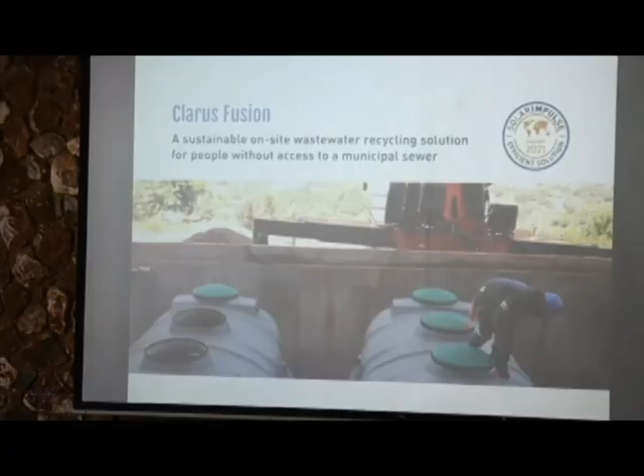So there's some green material, also going to the Solar Impulse Foundation. There are only 2 companies in Africa listed with Solar Impulse, and this is one of them. To be listed there's a set of criteria, and one of them is you must already be in commercial operation—not a trial, design, or test phase, it must already be commercially accepted.

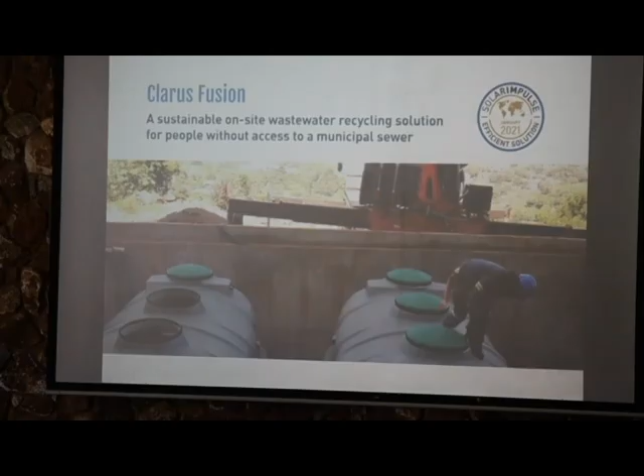When we look at on-site wastewater, I'm not going to spend time on that, but we speak to 13 of the 17 SDGs—not all 13 necessarily on the same site, but we speak to 13 of the 17. Now, to all the corporates and consultants to corporates sitting here, if you want to increase your SDG score, have a look at this. This is a way to do it.

Now you can take it one step further. If you're corporate and need to spend your corporate responsibility money in communities, when you spend money in a community you start talking about no poverty, because people can use the water to grow food. You talk about zero hunger, gender equality, and health. How do you talk about health with wastewater? It's very simple—kids don't play in sewage-contaminated soil anymore because you're giving proper sanitation.

So when you fund something like this for a community, you score SDGs, but you also get points for your community responsibility. So it's a double win yet again.

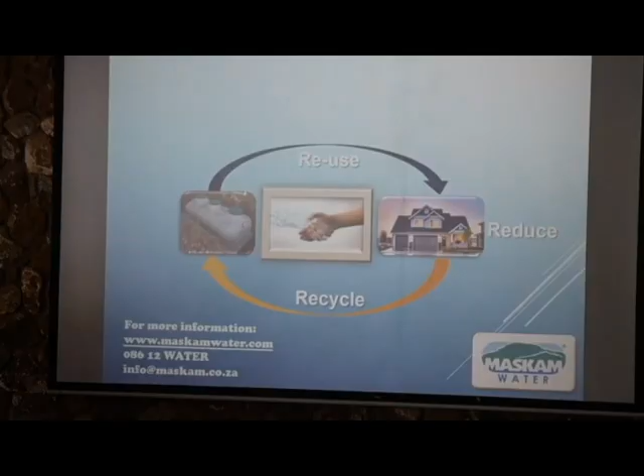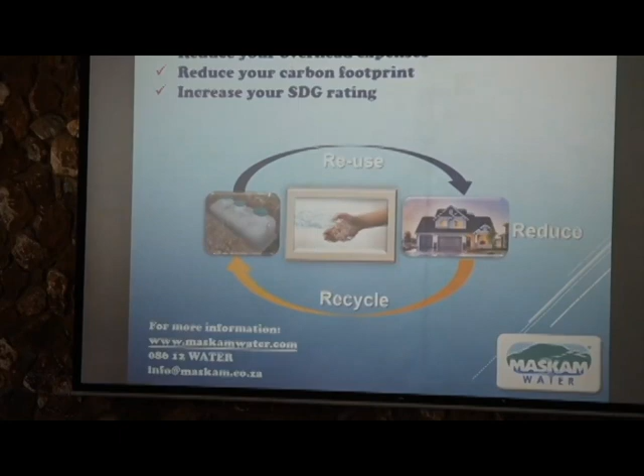So ladies and gentlemen, with that, I want to say on-site recycling will increase your water resilience. It will reduce your overhead expenses in not buying water, or buying less water at least. It will reduce your carbon footprint, increase your sustainable development rating, and increase your ESG score, because for your E—environmental—you need to drop your water consumption by 20%. You can do it with this, so you can score on your ESG. And you save our water courses, which Darren will love, when you go off grid. Thank you very much.

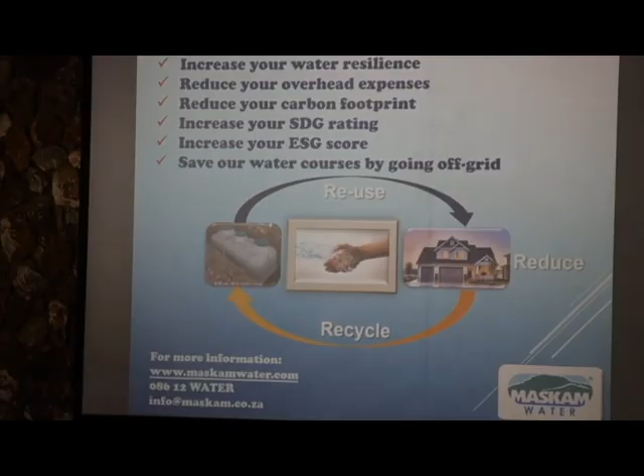Question at the back? Sorry, Darren, over here. Yeah, sorry, just regarding your financial modeling—I know legislation around bylaws and capital is great, but I'm specifically talking about rising taxes and rebates in terms of the sewage charge. So incoming water, you get charged for the outgoing in terms of sewer, they normally take the same meter read. So with this type of system you're using for irrigation, Cape Town's catching up, like you're saying, Gauteng's far behind. So on the development side, we find ourselves behind the 8-ball looking at the long-term win of rising taxes.

Okay, so if we're talking from a financial model, your sewage charge in any municipality is calculated as a percentage of your water consumption. Joburg used to charge you per site, but there was a court case and they lost, so now it's charged as a percentage of your water consumption. So even if you use it for irrigation, the municipality charges you for your total water intake—they don't care what you do with it inside your property. So when you irrigate with municipal water, you actually pay a sewage charge because they can't distinguish where you use it. When you irrigate with treated effluent, you take in less water, so you pay less for water, but at the same time your sewer charge also drops. So there's a direct financial benefit, and that's where you can even finance it.